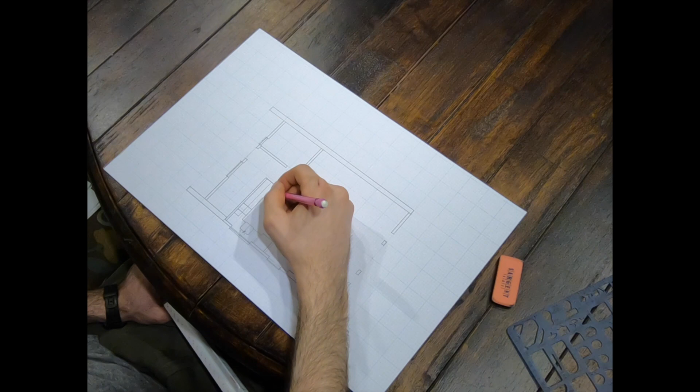After the kitchen is done, I'm going to go in and add the appliances in the rest of the house. So I'm adding in the washer, dryer, the pressure tank. I'm adding in all the appliances in the bathroom, the shower, toilet, sink. I'm going to add in the pellet stove that will heat the entire house. And then I'm going to make sure all the doors and windows are correctly labeled.

After I get all those appliances back in, I'm going to go in and add where each stud is going to be. As it's an A-frame, each of those big thick walls are going to be about 10 inches thick, and they're going to have a 10 inch by like 20 or 24 foot 2x10 running up to the peak, so the entire sides are going to be the roof. Then the flat ends are going to be just 2x6 standard framed walls.

After I get all that added in, I go back and add the rear deck first. This deck sticks about 8 feet off of the back, and it's about 16 feet wide, I believe. Then I do the front deck. This deck is going to sit in between the two roof pitches, so it's going to be completely covered down to almost the bottom of the deck by the roof. There will be about 4 foot of covered space there to come in and take your coat off and do all that.

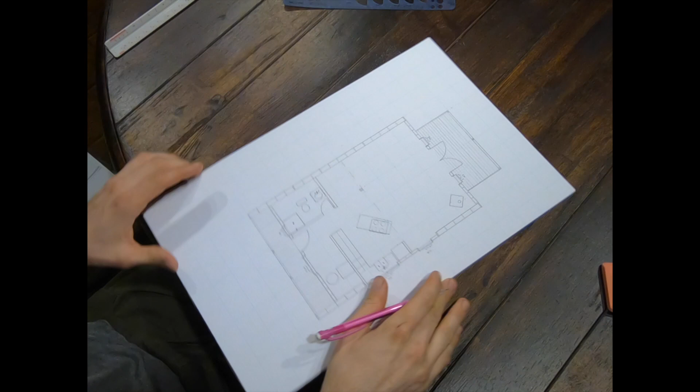Then after I get done with the first floor, I'm moving on to the second floor. For the second floor, I do the exact same thing. I'm going to do the exterior walls for it first, adding in all the placement for the windows. And then the second floor is going to be a loft area. So half of the second floor does not overhang the first, which means half of it's open and there's a cathedral ceiling for the first floor.

That big piece that sticks out is also a dormer that's going to extend all the way from the first floor to the second floor. That way we have more width, put like a bedroom, and I can actually fit a closet and hopefully one day a bathroom upstairs. As you can see, I'm adding in all the same things I did on the first floor. I'm doing the stud placements, the interior walls, all the windows, and then all the interior doors at this point.

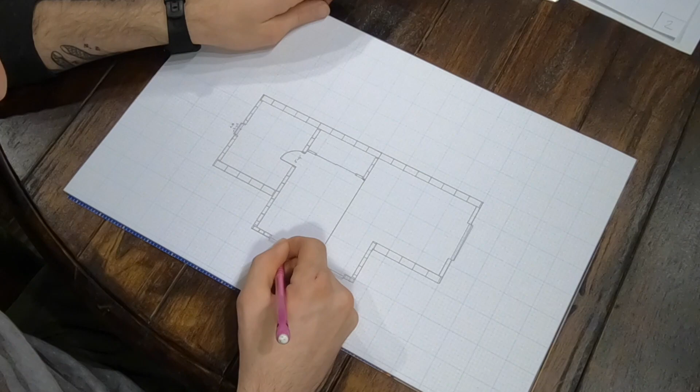I'm referencing the first floor to see where everything goes on the second floor and how things fit. Right now I'm adding in a staircase, so that will be a spiral staircase going up to the second floor in that dormer area.

Now you can see I'm just adding in dimensions along the entire thing, so it's all dimensioned out. Once again, we have 32 feet from the front to the back, and again, it's 24 foot wide.

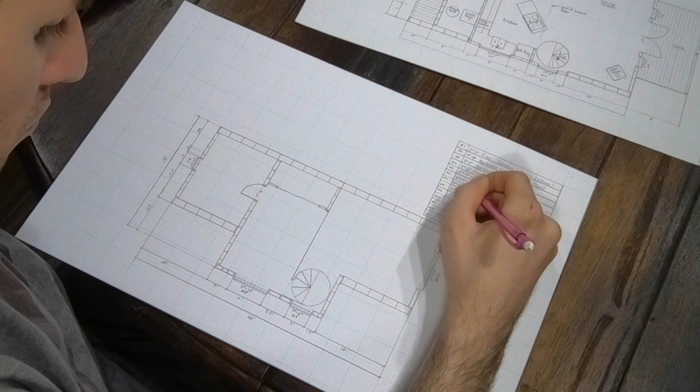Right now, up in the top corner, I'm making a window and door schedule. So basically, all the windows in the entire structure are numbered 1 through like 10 or 12. And then I have the front door, the rear door, and all the interior doors are going to be the same. So I'm just adding in what they are, whether or not they need to be tempered, whether or not they're privacy glass. Like on the bathroom on the first floor, there'll be privacy glass and it's tempered because it's within the shower stall.

After that, I add in the direction arrow so that north is identified, and then I label what the plan actually is.

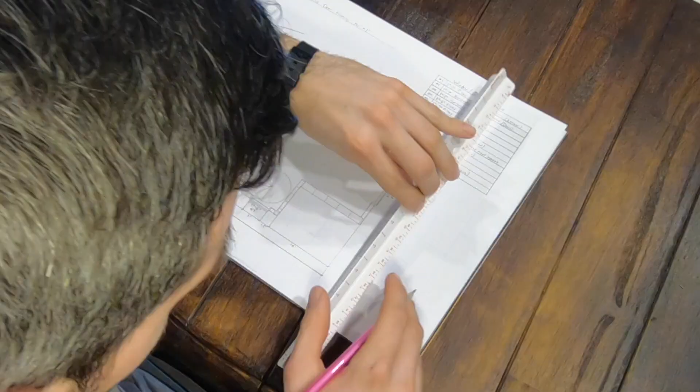That's about it for this video.